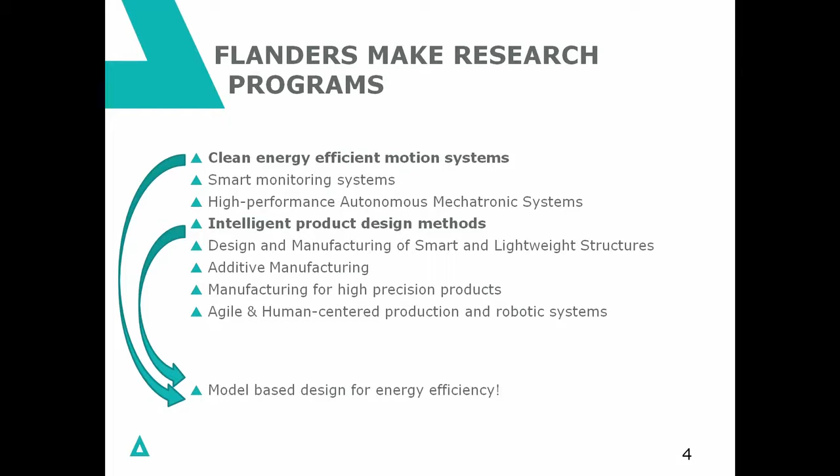In this talk, I will show how you can use the intelligent product design methods, the model-based product design methods, in order to increase the energy efficiency of motion systems.

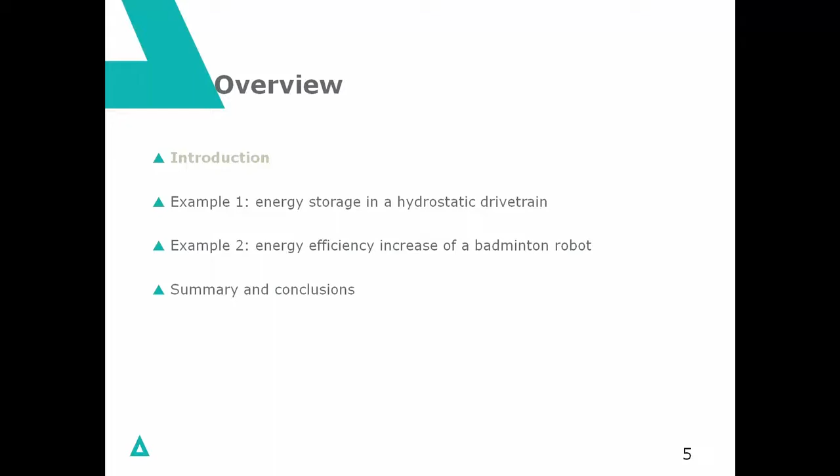This is an overview of my presentation. I will start with a short introduction about the importance of energy efficiency, and then I will give you 2 examples on how we used model-based design to increase the energy efficiency in machines. Finally, I will end with a summary and some conclusions.

So the introduction. As you all know, energy efficiency becomes more and more important when designing a machine, and the reason for that is twofold. On one hand, there is an increased societal awareness about the importance of energy efficiency.

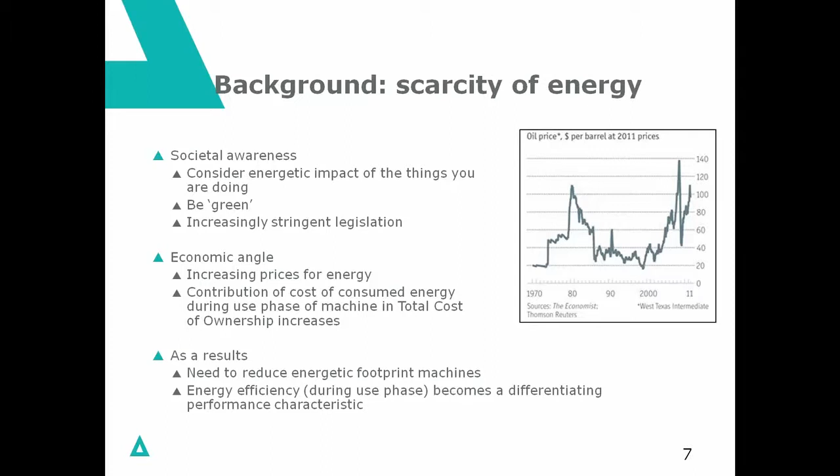People want to be green. They also want to have green machines. Also, legislation is becoming more and more stringent with respect to energy efficiency. And from an economic point of view, energy efficiency is becoming quite important because of increasing energy prices, as you can see in this graph.

You see that the price for a barrel is significantly increasing. As a result, manufacturers of machines are taking much more energy efficiency into account in the design of new machines.

If you want to reduce energy consumption during the use phase of a machine, there is typically a general approach being followed. First of all, you try to avoid useless energy consumption. For example, when a machine is in standby, you have to turn off the machine.

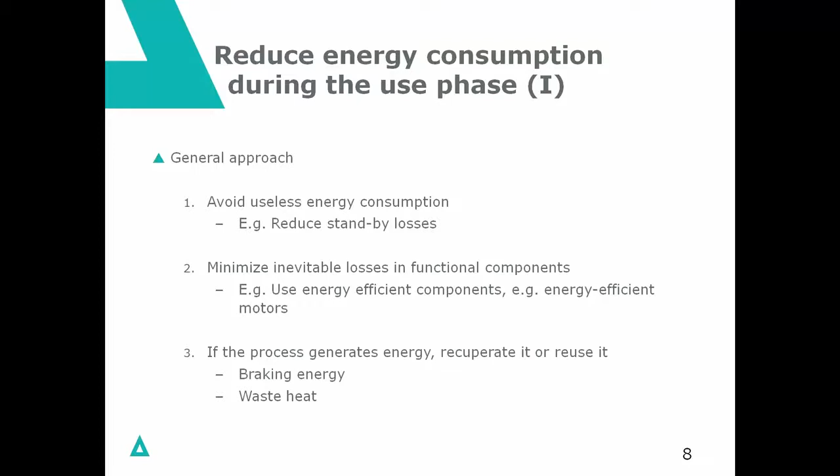On the other hand, there are inevitable losses in some functional components which are always there, and you want to decrease the energy consumption in these functional components. Then, if a process is generating energy, you can also try to recuperate that energy. For example, braking energy or waste heat recovery in machines is a potential source for energy recuperation.

We have been applying this approach to the drivelines of production machines and vehicles, and we have been looking at 2 levels. First, you can look at component level, trying to minimize the energy consumption of certain components, and a lot of companies are already doing this.

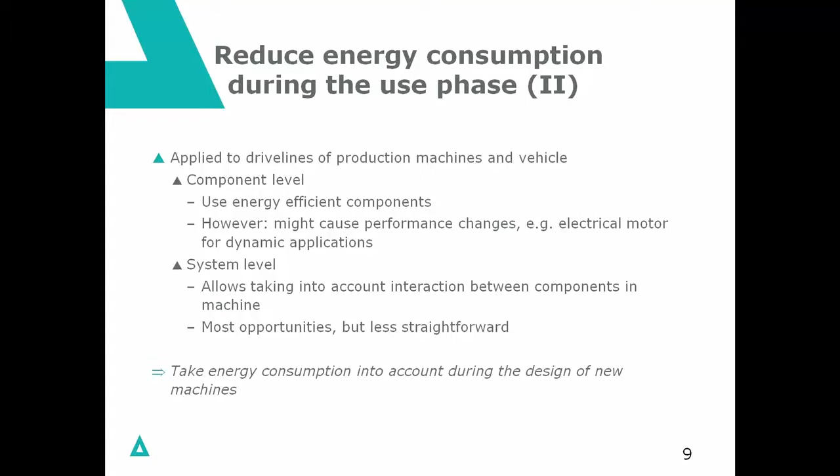On the other hand, you can also gain a lot when you look at a system from a system-level point of view, considering all the interactions between the different components. In this way you can also try to increase the energy efficiency. You have to look at the system as a whole. There will be energy flowing from one component to another, and by taking that into account in the design, you can decrease the energy consumption.

So, to increase that energy efficiency in the design of the machines, we are using a model-based design approach.

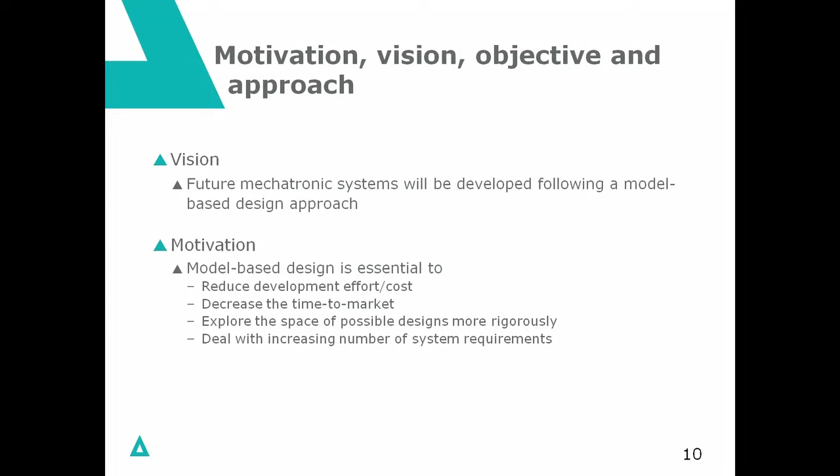So what will this model-based design approach offer us? It will offer us the opportunity to quickly evaluate the impact of design changes.

Typically in model-based design you will use a model to describe the function of the components. You start with modeling different components, then combine them, and then simulate the whole machine. The difficulty with energy is that it flows between the different components, so you need system-level models of your machine. You cannot look individually at different components, you have to look at the whole of the interacting components.

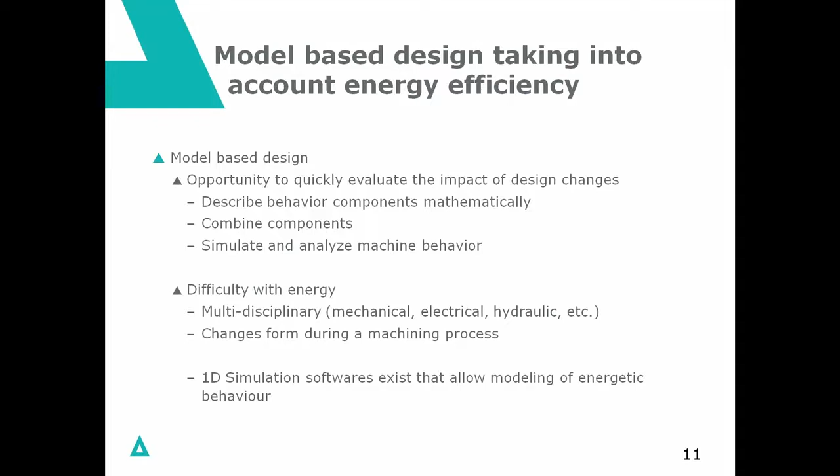We are using existing 1D simulation software, and at Flanders Make we are looking at how you can use those available softwares to increase the energy efficiency in the design phase of a machine.

A first case study that I will talk about is a hydrostatic drivetrain, and we have been looking at these hydrostatic drivetrains and their energy efficiency. We have some member companies, for example a manufacturer of harvesting machines, which also gave a presentation before noon. In these harvesting machines, they have such a hydrostatic drivetrain.

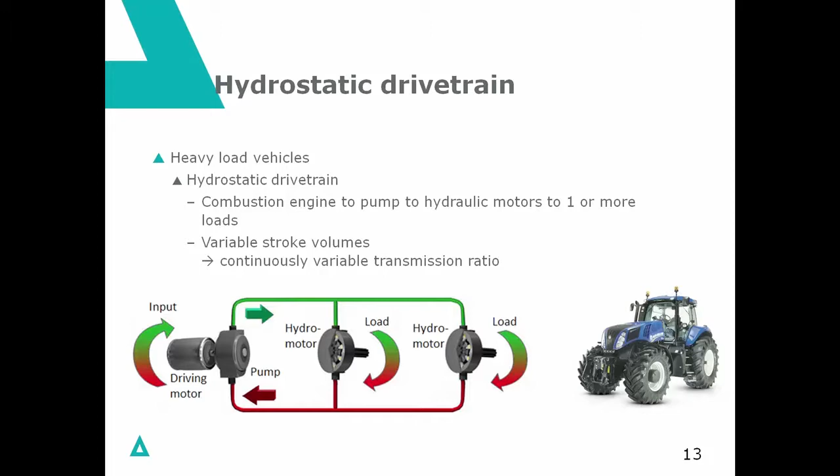Such a hydrostatic drivetrain consists of a driving motor, which is driving a pump, and then this pump is driving in parallel two hydro motors. Each hydro motor can drive a wheel of the vehicle. What is the advantage of such a hydrostatic drivetrain? By changing the strokes of the pump and the hydro motor, you can change the transmission ratio between, on the one hand, the motor, and on the other hand, the load.

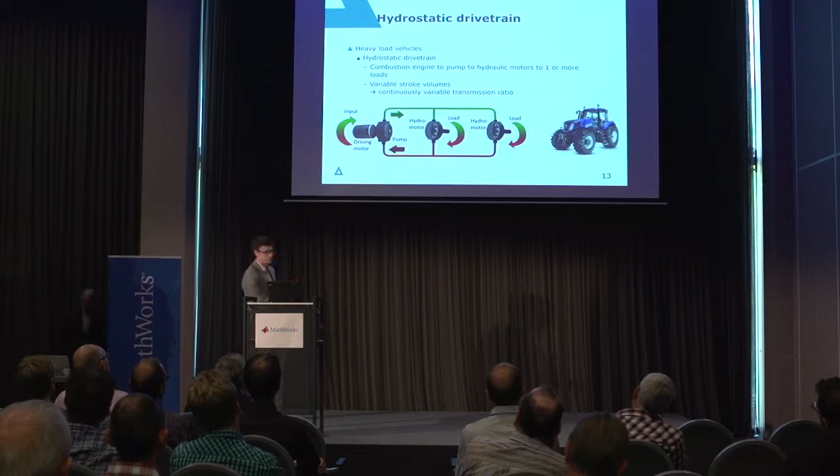We built in our lab an experimental hydrostatic drivetrain setup, where an electromotor is driving a pump. This pump is driving in parallel two hydro motors, and then we have also a simulation of the vehicle load, with a flywheel and an electromotor.

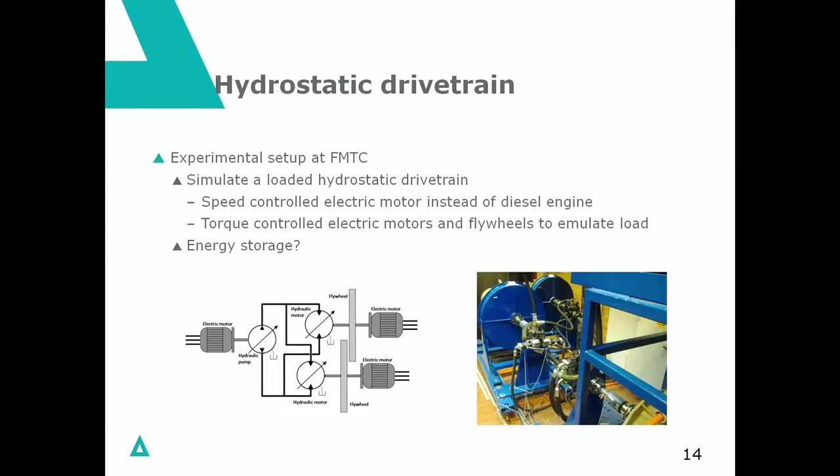And then we asked ourselves the question: we would like to increase the energy efficiency of this setup. We want to add an energy storage element in this setup, and we want to evaluate which energy storage element would be the best.

Therefore we are thinking of different possible concepts. On the one hand, we could add an energy storage component in the mechanical domain, for example by adding a flywheel to the system. We could add energy storage in the electrical domain, for example adding supercapacitors or batteries connecting to the DC bus of the drive of the system. Or we could add energy storage in the hydraulic domain by adding hydraulic accumulators to the system.

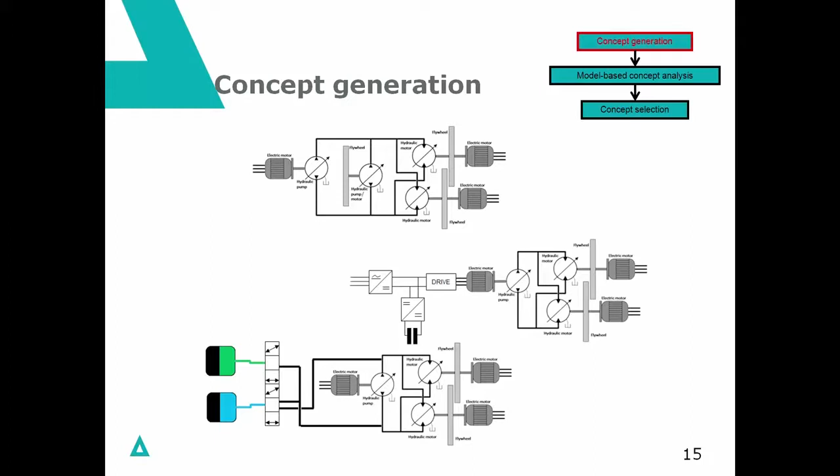And the question was, what is now the best? We wanted to use model-based design, to use models to give us an indication about what was the best solution for this problem.

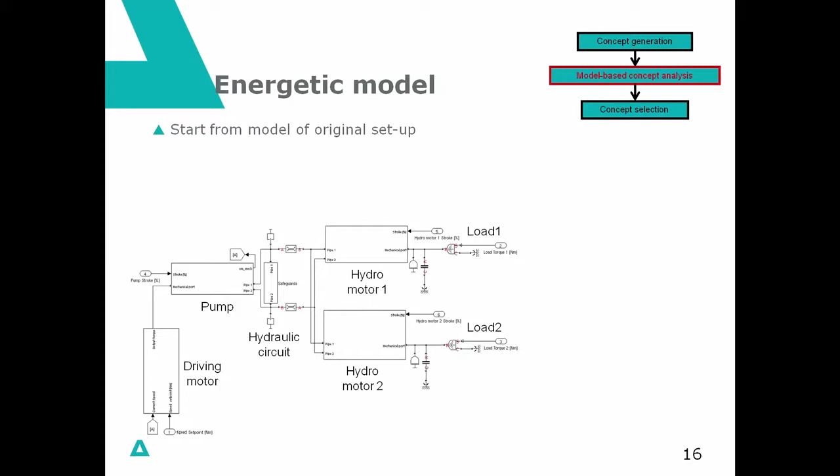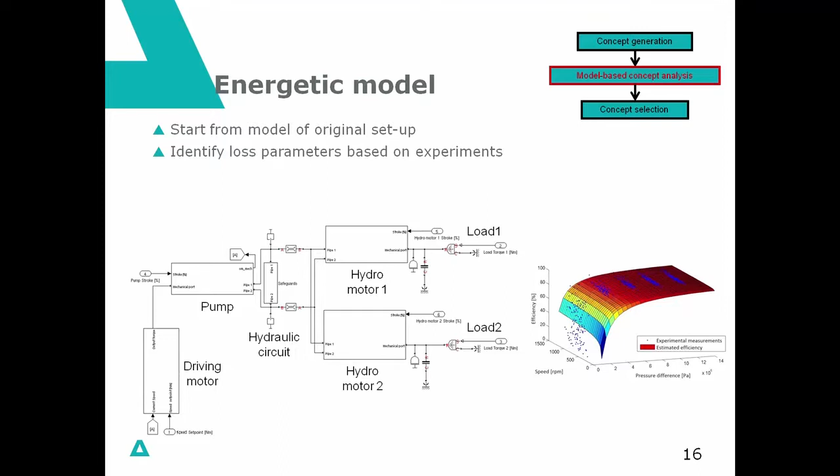So first we built a model of the initial drivetrain consisting of the driving motor, a model of the pump, the hydraulic circuit, the hydro motor, and the load. Then a second step was the identification of the different parts of this model. We were measuring the efficiency curves of the different components and added these efficiencies into the different components. So we had initially the ideal behavior, and then we extended this ideal behavior of the different components with some energy efficiency characteristics.

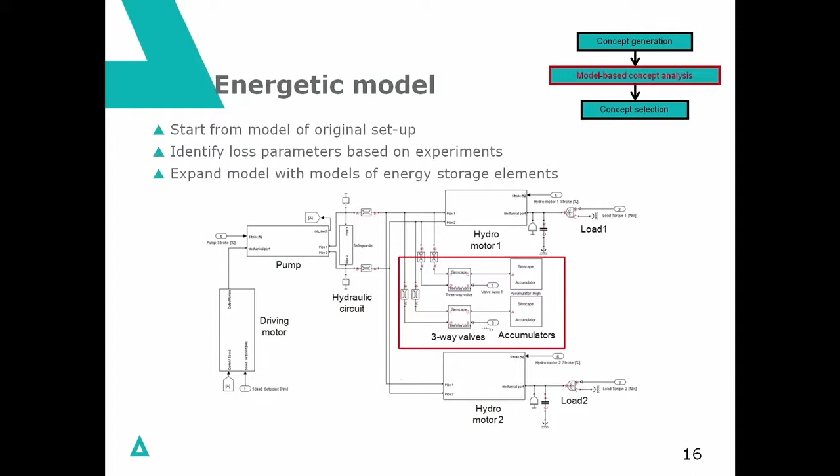And then a final step was to also add the energy storage components to the models. We added, for example, a model of the accumulators and the valves which are connecting these accumulators to the hydraulic circuit of the hydrostat. We did this not only for the hydraulic components, we also did it for the electrical storage elements, and we did it also for the mechanical storage elements.

Then the next step was we wanted to evaluate how good the different energy storage mechanisms were, and therefore we were doing some simulations of some representative load scenarios of the system.

An important step was that we had to dimension the different energy storage components. We had to choose an optimal volume of the hydraulic accumulators, and an optimal size, for example, of the supercapacitors, changing the number of capacitors per serial branch and also the number of parallel branches.

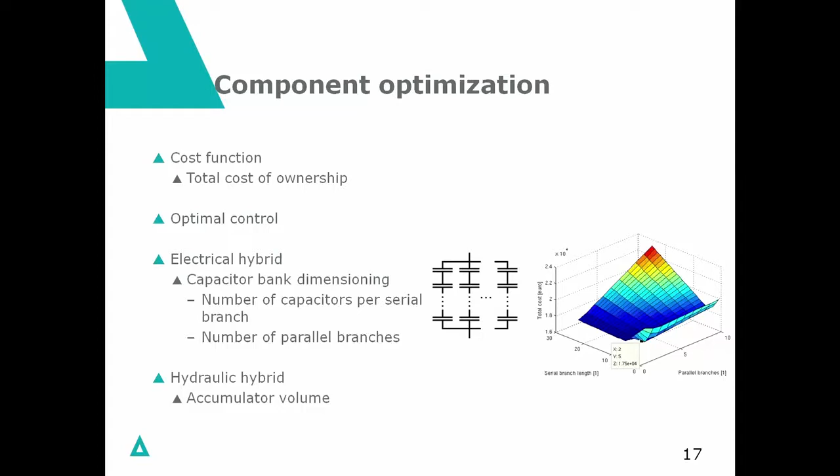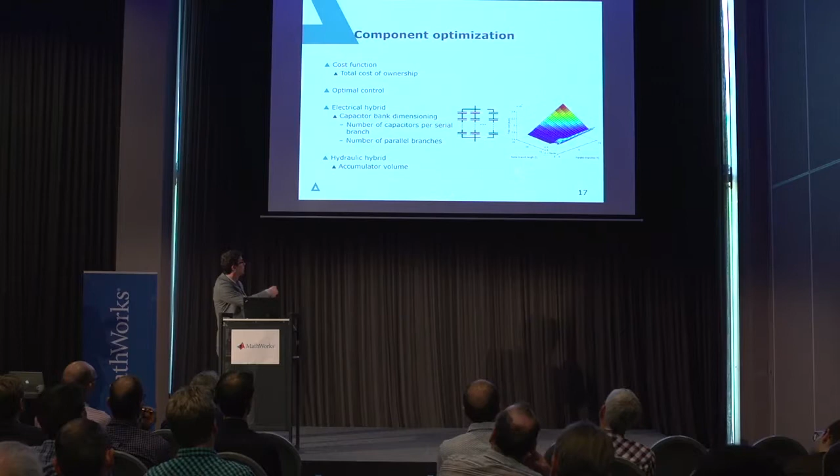This way you could see how this was influencing the total cost of ownership of the machine. The more energy storage you foresee, the higher the cost will be, but also probably the higher the energy efficiency of your system. And that's what you can see here in this graph: there was a certain optimal number of serial and parallel branches of the supercapacitor.

We did the same also for the accumulator. And then, using these models, we could compare the total cost of ownership of the different energy storage elements.

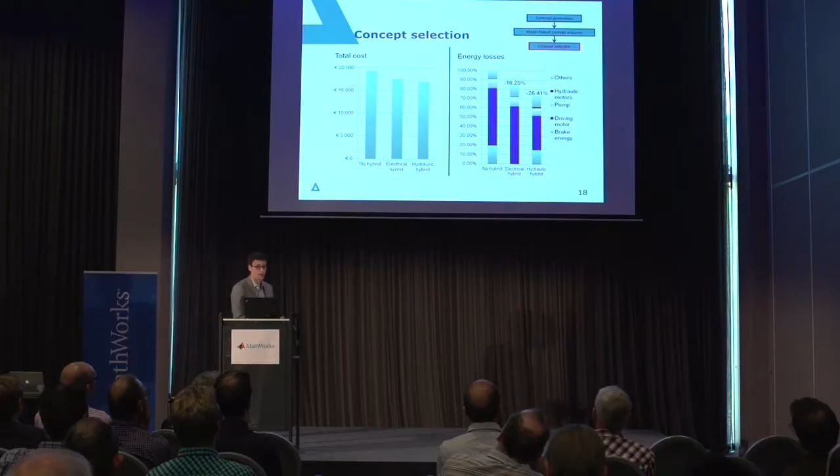If you see here, when you have no hybrid solution and no energy storage element, you could already gain a certain cost reduction when using an electrical storage element, and even more when using a hydraulic storage element. And then we were wondering, why is this the case?

We could use the models to find the reason, and in fact it was that when you are trying to recuperate braking energy, this braking energy is typically at the load side. If you want to use electrical components to store your energy, the energy has to flow through the hydromotors, through the pump, through the electromotor, and then you have your energy storage element. If you want to reuse that energy, it has to pass again through the electromotor, through the pump, through the hydromotors, and then you could reuse it at the load side. Each of these components has a certain energy efficiency and resulting losses.

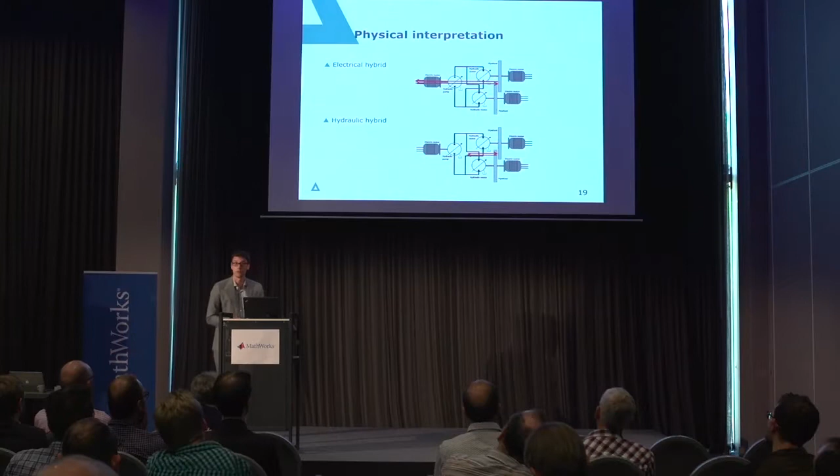So you have losses in all these components. When you have a hydraulic storage element, you only have to pass through the hydromotor, and then you're already at your storage element, so in this way you have fewer losses. That was the first example.

Here we mainly focused on the design. Now I have a second example where we focused on the control of a system. By improving the control and using a model-based controller, you can also improve the energy efficiency of a system, and we applied this to our badminton robot.

At Flanders Make, we developed a badminton robot. The reason was that we wanted to develop our own machine, and we chose a badminton playing robot. Why badminton? Because badminton is a very high dynamic sport, and the machines our member companies develop are also high dynamic machines, so we chose the application of playing badminton.

Initially, we had this robot, and it consumed quite a lot of energy. We were wondering, okay, how can we increase the energy efficiency of our badminton robot? The first guess was that our robot was accelerating and decelerating quite a lot, and we thought that during deceleration, a lot of energy was consumed as braking energy.

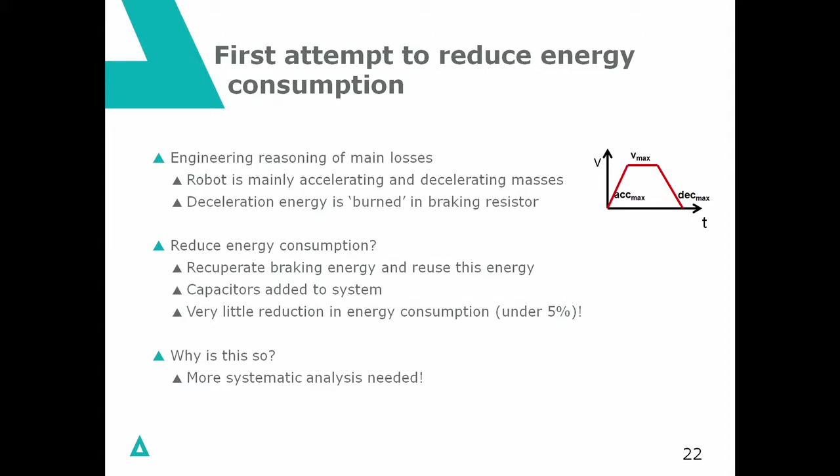That energy was being burned in the braking resistors in the electrical part of the drivetrain. So we thought, okay, maybe we should add some capacitors in the electric part of the drivetrain. We expected we could store the energy in these capacitors and drastically increase the energy efficiency of our machine. However, when we did this, we saw almost no energy efficiency increase - only a reduction in energy consumption of less than 5%.

We thought, okay, maybe we have to do a more thorough analysis of the reason for this, and use that analysis to further increase the energy efficiency of our robot. Therefore, we developed models of the badminton robot, both of the electrical part and of the mechanical part.

We had, for example, elements of the brake resistance, the coil resistance. We also had elements representing the friction in the mechanical domain. So we were modeling both the electrical drivetrain and the mechanical part of the drivetrain of the robot. We were also doing a system identification to find the real parameters in the model.

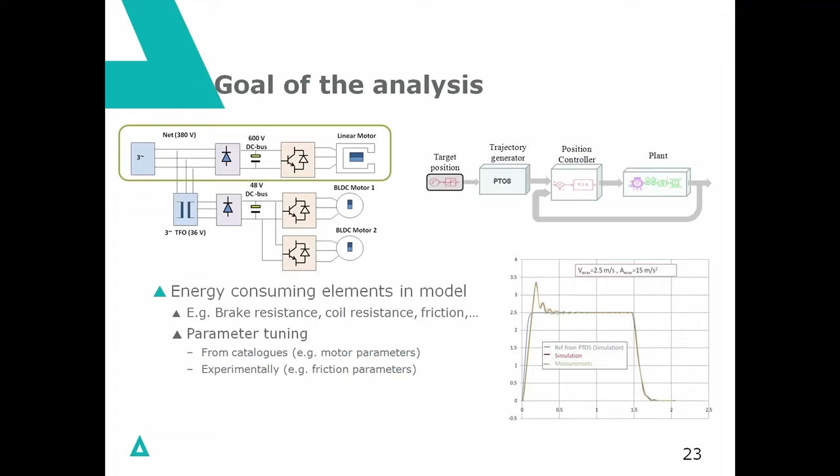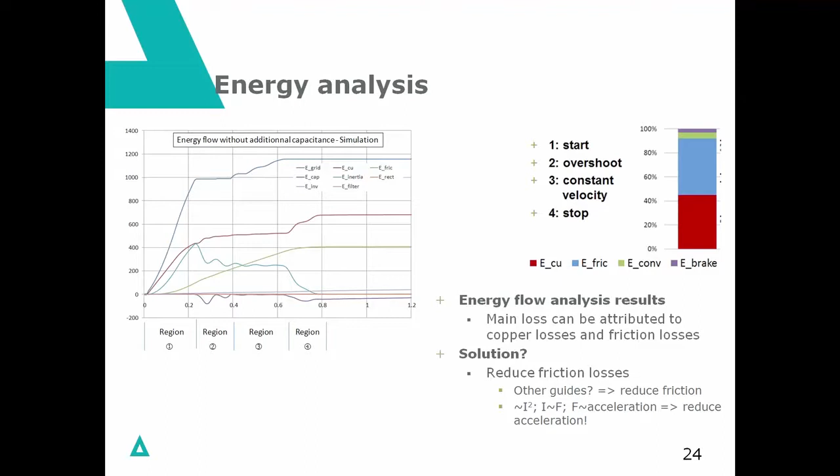This explained why we could only achieve a limited energy efficiency increase by adding the supercapacitors. If you further look at this graph, you can see that a lot of energy is consumed as friction energy, and also a lot of energy is consumed in the motor due to the copper losses that are there.

The friction losses were mainly related to the speed with which the robot was moving, while the copper losses were mainly related to the acceleration. So the higher the acceleration, the higher the copper losses; the higher the speed of the motor, the higher the friction losses.

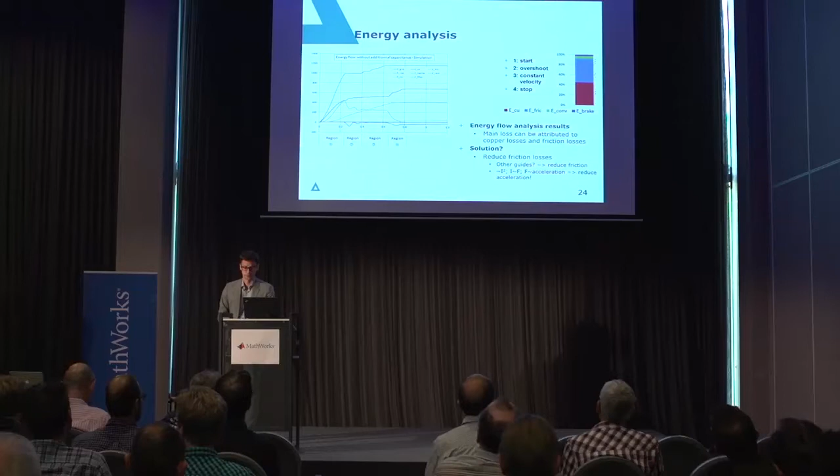And therefore, we decided to change our control strategy, because initially we had a control strategy where the robot was moving as fast as possible to the point where it had to intercept the shuttle.

The first controller that we developed had the robot moving as fast as possible to the position where it had to hit back the shuttle, and then it was waiting for a certain amount of time before hitting back the shuttle. In this way, it was accelerating very hard, moving with a very high speed, and decelerating very abruptly, consuming a lot of energy.

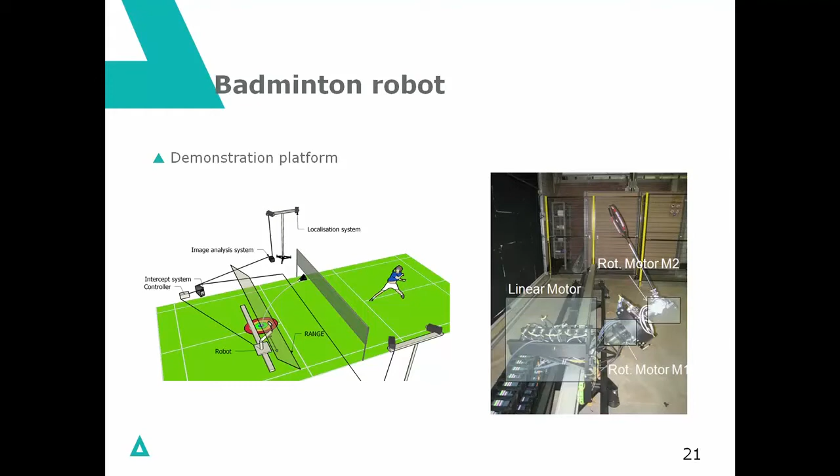We decided to change that control strategy into a just-in-time controller, where the robot was accelerating with a lower acceleration, moving with a lower speed, and decelerating in a smoother way.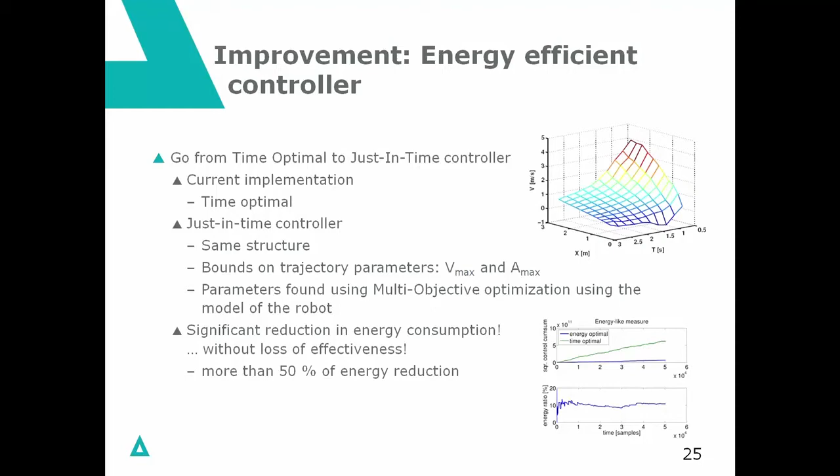In the real controller, we had to allow a little bit more robustness, but we could still get more than 50% energy reduction just by using the control strategy. With the same hardware and same performance, we were able to hit back the same amount of shuttles, but just by changing the control strategy, having the same performance, we could reduce energy consumption by more than 50%.

I have here also two videos. The first video is showing the performance of the original controller, and you will see that the robot is moving to a certain position and is then waiting, and then is hitting back the shuttle. So it's moving, waiting, and playing back.

Then I have a second movie where the robot is moving much more smoothly, gradually to the position where it has to hit back the shuttle, and then hitting back the shuttle. We have the same performance in both cases—the same amount of shuttles is being hit back—but the energy consumption has been reduced by more than 50%.

Okay, these were two applications that we studied and investigated in our lab. However, we used the same techniques also in some industrial applications.

For example, here you can see a crane, and in this crane we have such a drivetrain. We have a diesel engine, and this diesel engine is driving a generator, and this generator is then driving a few motors. The question of our partner was, what kind of energy storage element should I add, and which kind of control strategy should I use?

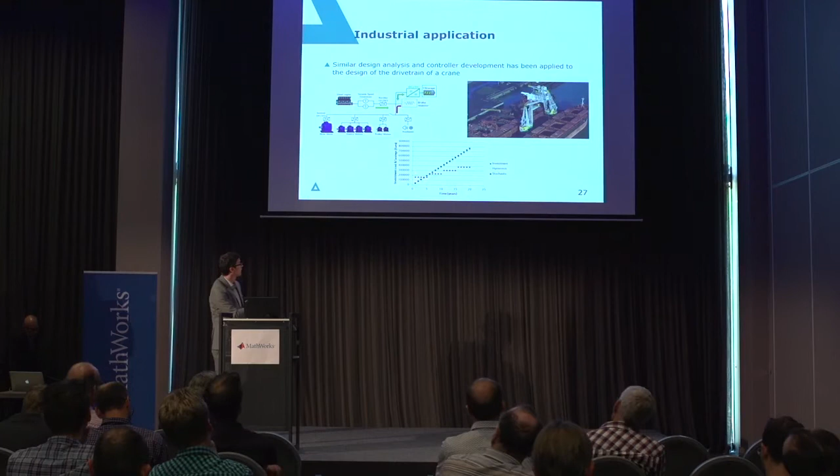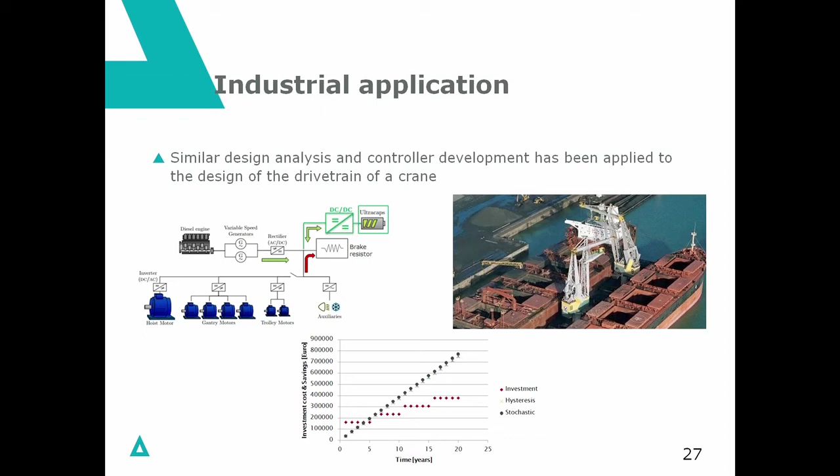This brings me to the conclusions of my talk.

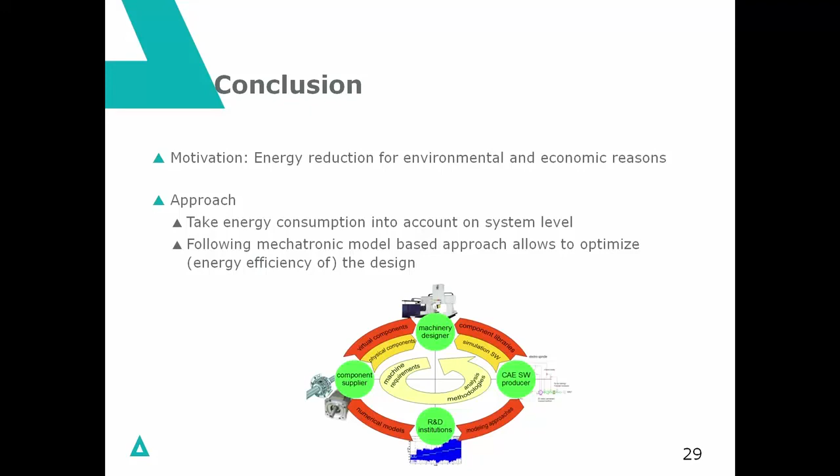The motivation of the talk is that energy reduction in machines and vehicles is really necessary because of environmental and economic reasons. If you want to evaluate the energy efficiency and energy consumption in a machine or vehicle thoroughly, you need models—1D simulation models—because you have to take into account the total system. You cannot focus on a certain component; you have to focus on the interaction between all the components. So you need system models, and using these system models will allow you to optimize the energy efficiency of the designed machines and vehicles. Thank you for your attention.